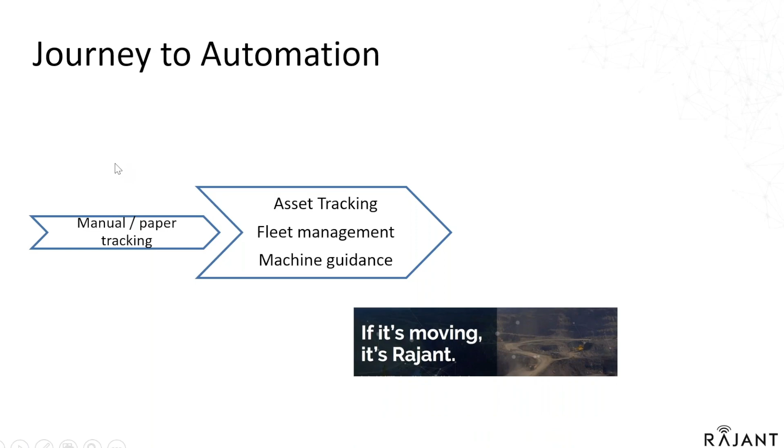So the mining industry's journey to automation obviously started with some manual tracking, paper tracking. Those days are long gone. Then most of you remember the introduction and adoption of asset tracking, fleet management, machine guidance, these kinds of software, hardware, technology solutions that required a very stable wireless communication. And as long as the wireless communication was working fine, nobody really thought about it. It's only when things started acting up or you had hiccups or loss of data that everybody was paying more attention to it. So this is the time that Rajant entered, and we fortunately were able to work with a number of mining operations to improve their use of technology.

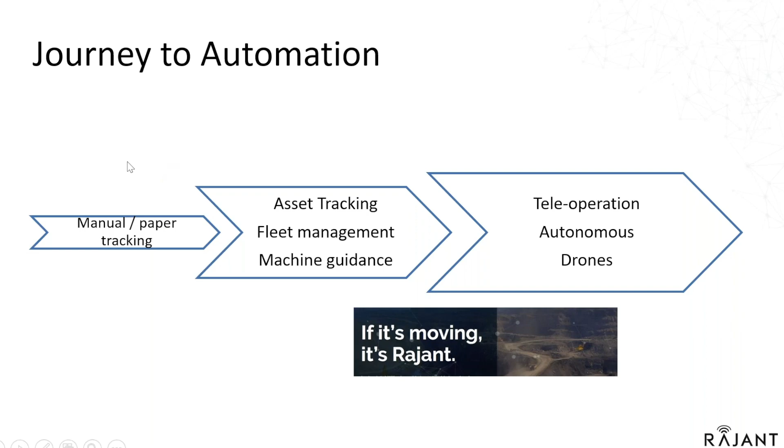So a couple of the 4 benefits that I feel are important are, first of all, we do not use a central controller. This allows a network to be really fast. And you will hear later when Samuel is presenting how fast our network can be when it comes to sending and receiving video from multiple screens. We always use multiple frequencies and antennas. This provides a very high level of availability. The word mesh, when we say we offer kinetic mesh, we have a mesh network. In our case, we mean that every unit, every node can talk to every other node, which is a huge advantage.

So let's get back to what we're here for. When it comes to these automation projects that mines around the world are undertaking, Rajant particularly has been involved in a number of them. There's a coal mine in the US that has been using a teleoperated dozer. There's a copper mine in Chile, and Samuel will talk to us about what is happening in Brazil with a number of iron ore mines.

The result is a much more reliable network for mining operations. Another detail that allowed Rajant to prove its value inside mining operations is the capacity to automatically adapt to dynamic operations. Mining demands dynamism, and its network needs to be available during movement, never breaking for handoffs.

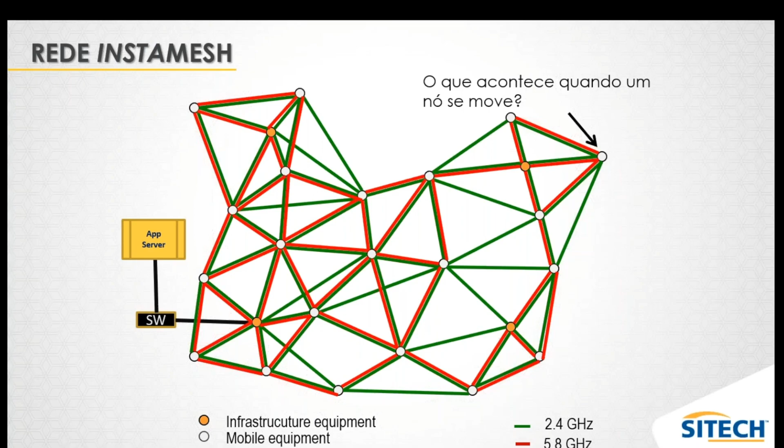As the equipment starts to move, it won't lose the many links it has to communicate. Before it loses the old links, it creates new ones as it gets closer to other radios. This is why Rajant uses the slogan, make never break.

The effect is the ability to adapt to movement. It is an extremely reliable network, exactly what miners need for their operations — never worry about networks and communications.

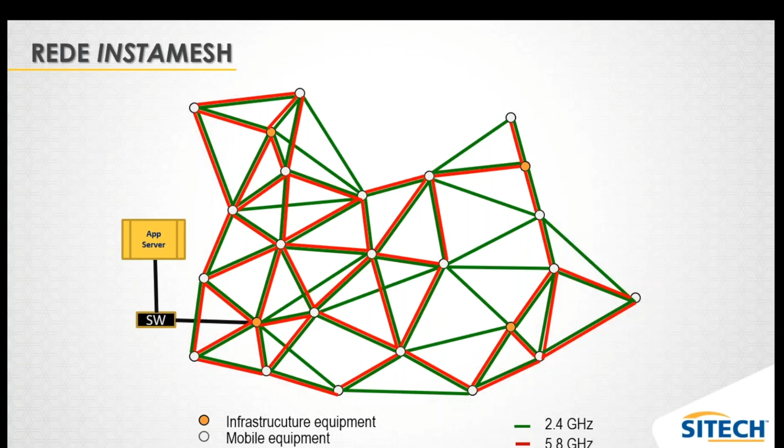Considering the specifics of the Rajant networks we spoke about before, how is it going to work in a real operation? Exactly as explained, every piece of equipment with Rajant inside will talk to the next machine or physical infrastructure: excavators communicating to wheel loaders, then drones, then pickups and trucks. Everything will talk and create a huge network for multiple purposes.

This includes telemetry, dispatch, fatigue monitoring, high precision, video surveillance, voice over IP, everything, and of course automation — all working on the same network.

In the Brazilian market, we are using some models from the Rajant portfolio. We have many units of the single band radio, the JR; the dual band radios, the KM3 and the ME4, working on 2.4 and 5.8 gigahertz; and also a lot of the 4-band radio from the LX family, which can also have 900 megahertz.

We use this equipment and these models according to previous network planning and to what the customer needs to communicate over the network.

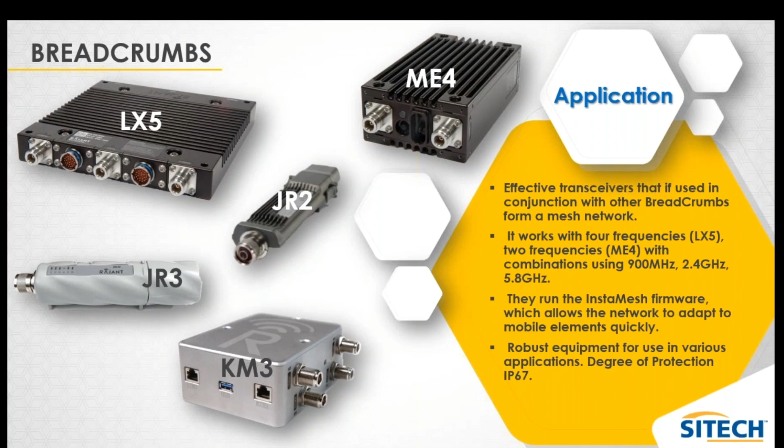Moving on to real examples of automation operating over Rajant networks. The first deployment in Brazil was for an ore stacker and reclaimers operation. These machines need to have constant communication, and each time the network had an issue, the whole operation stopped. The time to restart everything was considered a production loss, and these huge machines moved many tons per hour, so every minute was precious.

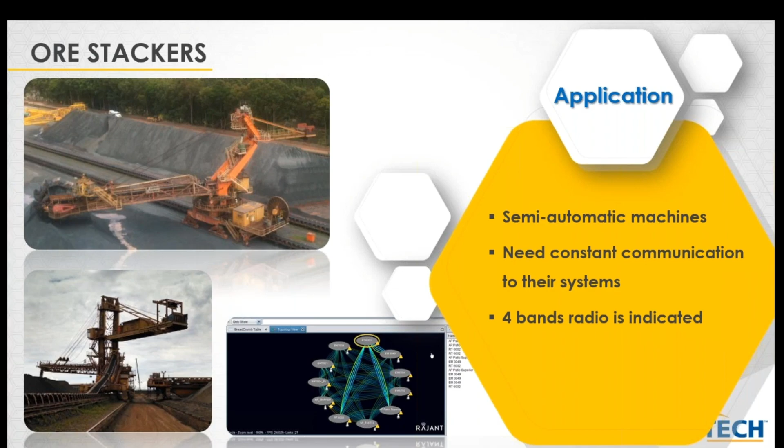For that solution, we considered using the 4-band radio to bring equipment and frequency redundancy. To confirm the increase of performance, and mainly what we could save in production losses if we could deliver a reliable network, we proposed a proof of concept.

That proof of concept allowed the customer to present this solution inside the corporation and defend it to be deployed over similar operations. They could present that the Rajant solution brought a level of 99.9% availability. This result was so impressive that they started to invite Rajant to new and more exciting challenges.

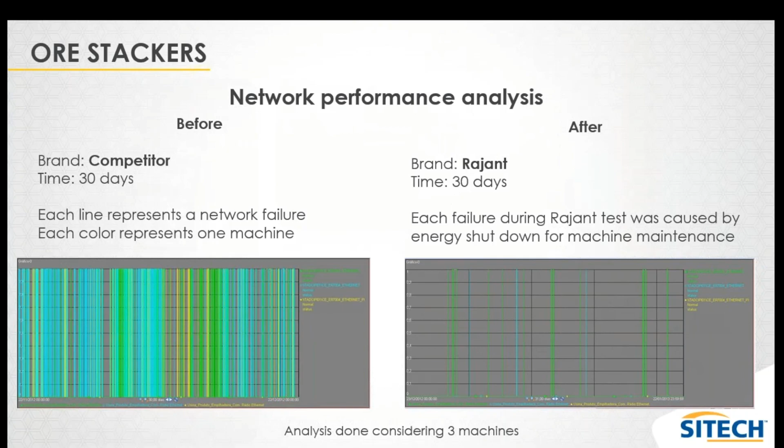So we started to help mining companies properly put many autonomous projects to work: autonomous drills, autonomous dozers, and different types of remote cabins. Rajant brought the desired level of latency, throughput for cameras, and all the technical requirements for these solutions to work properly. We will talk more about these types of projects during the presentation.

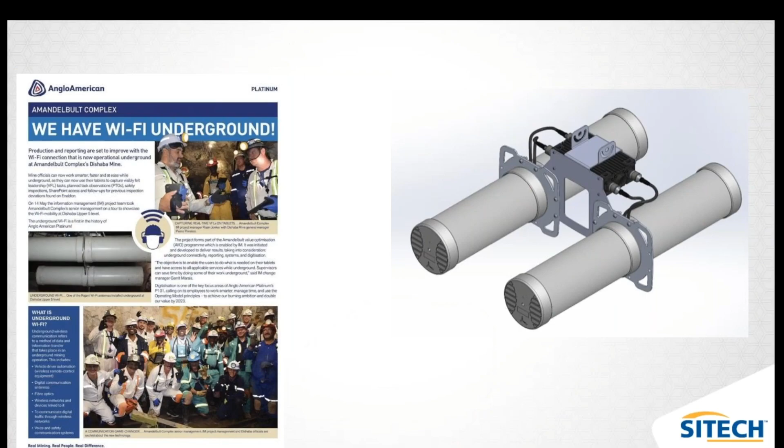Just let me check here. Saga, one minute, because I have to cover this part. One second please. No problem, I think everybody understands we are all working from a home office, and there are some unexpected challenges sometimes. Yes, you're right, I'm just checking if the slides are in the correct order so we can cover the right subject.

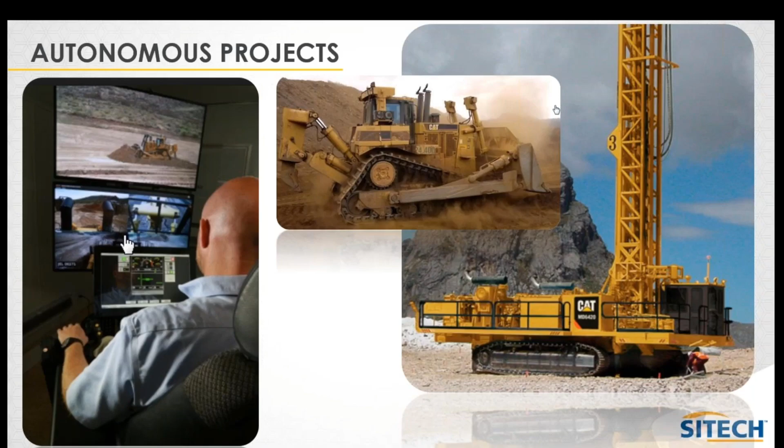Getting back to the real applications of automation, the next project that we supported - just updating the slide - was a very specific type of operation, but also with the same level of importance, because they needed to have a very reliable network.

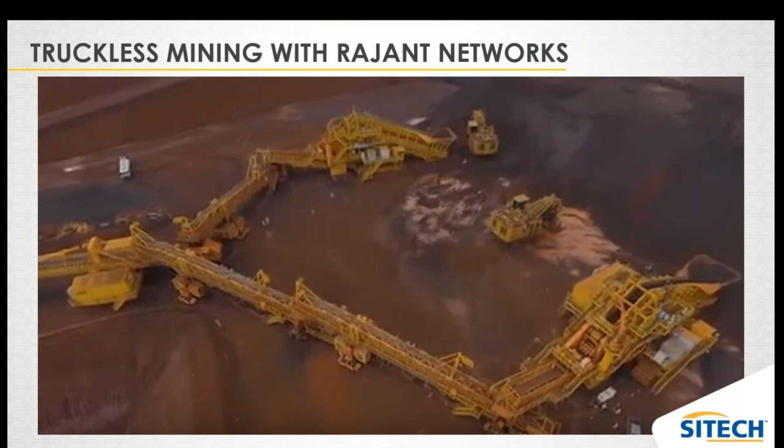It is truckless mining. Similar to the stackers and reclaimers operation, each part of this process needed to communicate with each other in order to properly work on the operation. And if a network failure happened, the whole process would also stop.

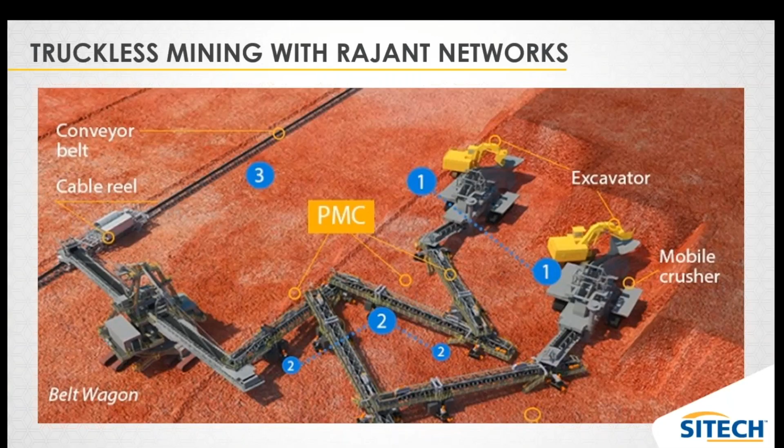So after we passed the PLC protocols challenges, we allowed the customer to move from a scenario of some $1 million in losses per month to not only zero losses, but also production capacity increases.

The most recent project for automation operating over Rajant networks was created after Brazil's recent episodes involving mining dams. We were challenged to design a way that companies would be able to remove material from the mining dams without the presence of humans in dangerous areas, which include not only the dam itself, but also the areas where the material could be projected if a collapse happened.

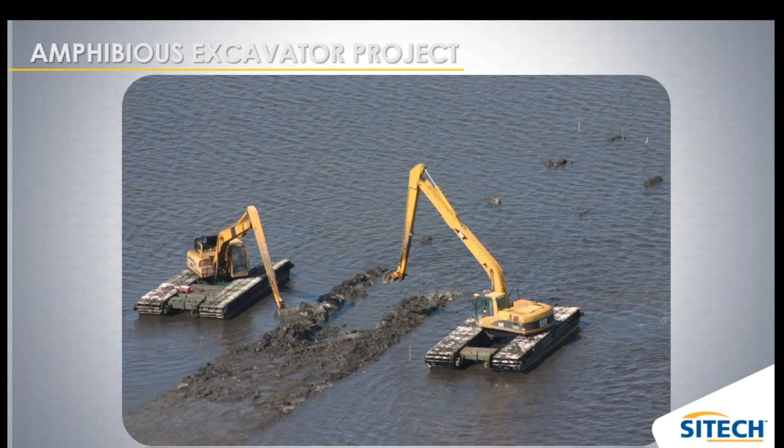So, including all the technologies inside the SITECH Brazil portfolio, we created a remotely controlled system for dam decommissioning operations, where it will be possible to operate heavy machinery inside the dam from a safe distance with precision and productivity. We could deliver this challenging solution because we were working during the last year on a request to apply remote control on an amphibious excavator that worked inside the mining dams, moving the material.

For this project, there was a risk that the machine could fall, so it was needed that the operation was unmanned. The operator would be outside the machine, operating from a safe distance or from an office, seeing the operation through cameras on a monitor or tablet. As we were already advanced on this solution, we were able to support the remote control for dams.

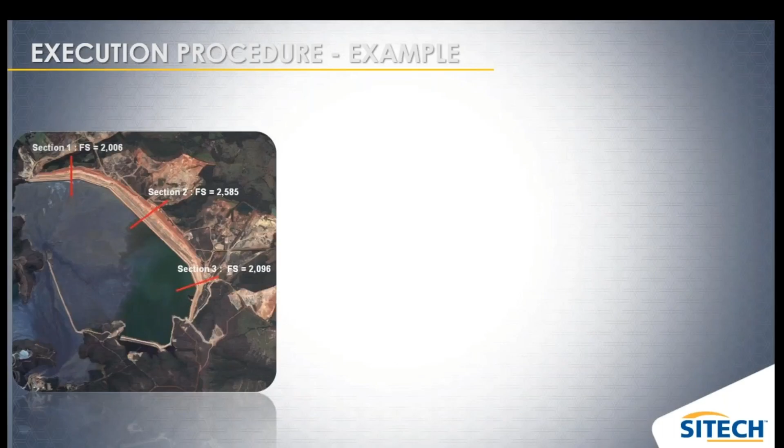Considering the dam decommission process, we would need to place not just one machine inside the risk area, but many, and of different types: trucks, wheel loaders, excavators, dozers. All these machines would be remotely controlled from a control shelter deployed in a safe area.

The red marked area over the picture is the dam area, where the trucks and machines would work. The blue area is where the safe shelters, the command centers, would be deployed, bringing high safety for the operation.

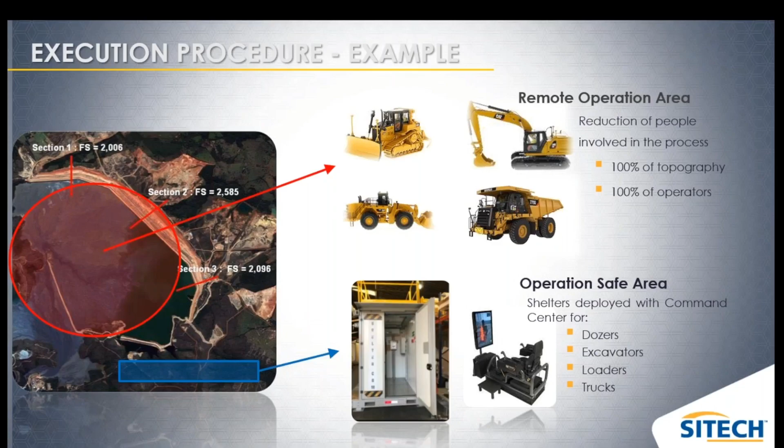In this way, there won't be any need for human interaction inside the risk area. We would place cameras at strategic positions on each machine, high precision machine control to allow the machines to operate according to a design project with blade automation, and radios to transmit everything in real time to monitors inside the control shelters. We would also use drones to collect images of the operation, upload these images to the platform, analyze and deliver updated data, update the 3D project, and send it back to the machines using the high-performance network.

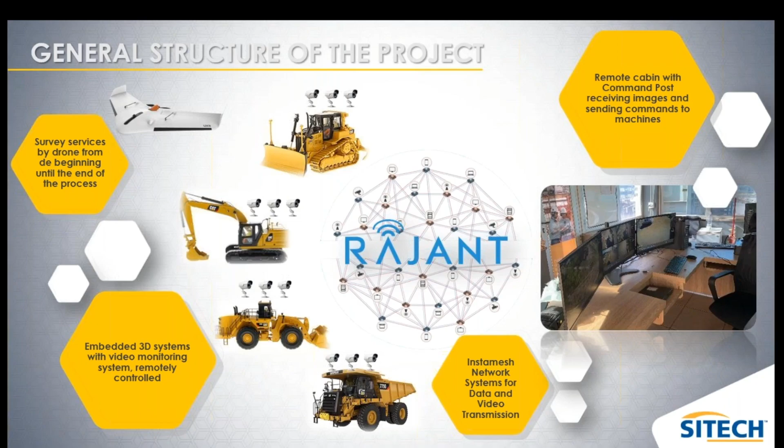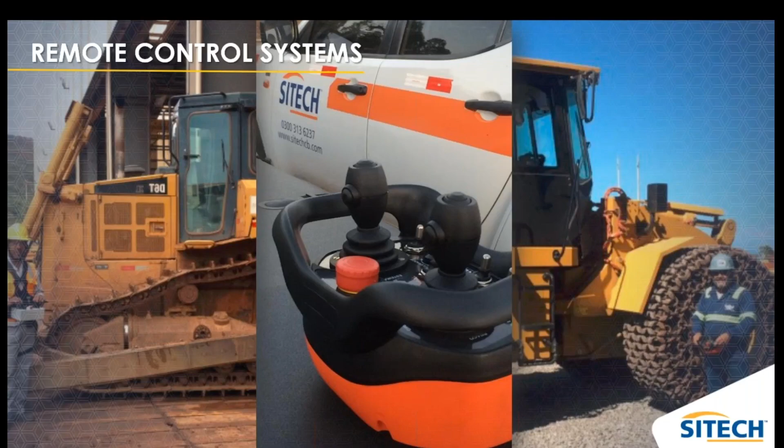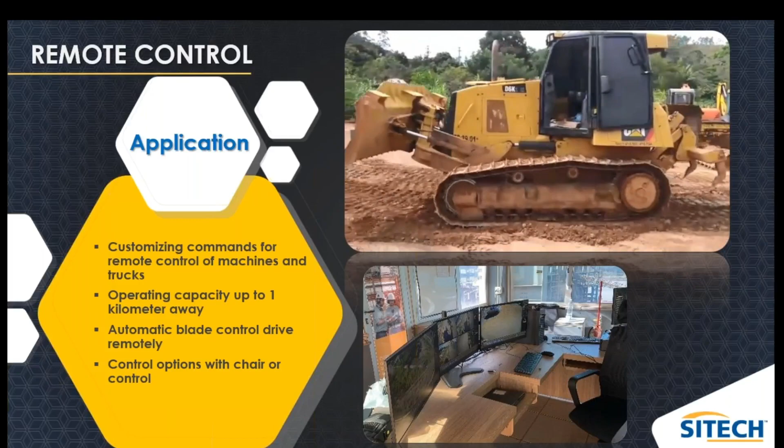The first technology we deployed, and a very important part, is the remote control. We used the remote control we already had in our portfolio, for the same reason we chose Navel as a brand to be represented by SITECH. They could customize the remote control for any machine necessary.

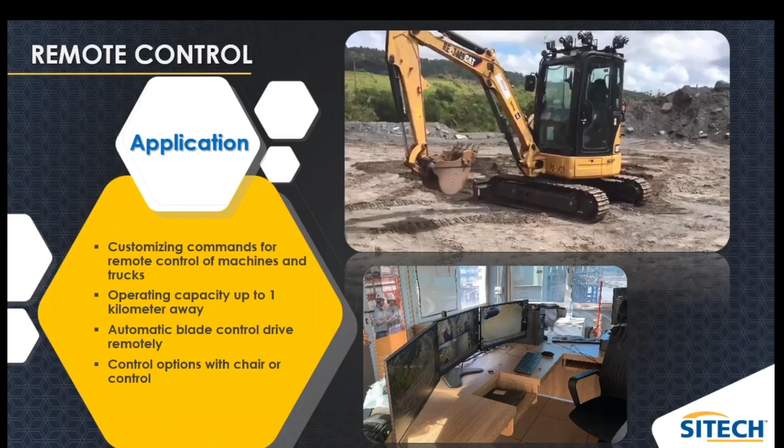We could operate machines up to 1 kilometer away, and we could include automatic blade control with high precision systems inside the remote control. We could operate the machines from a joystick, as you can see, or from a workstation inside the control shelter.

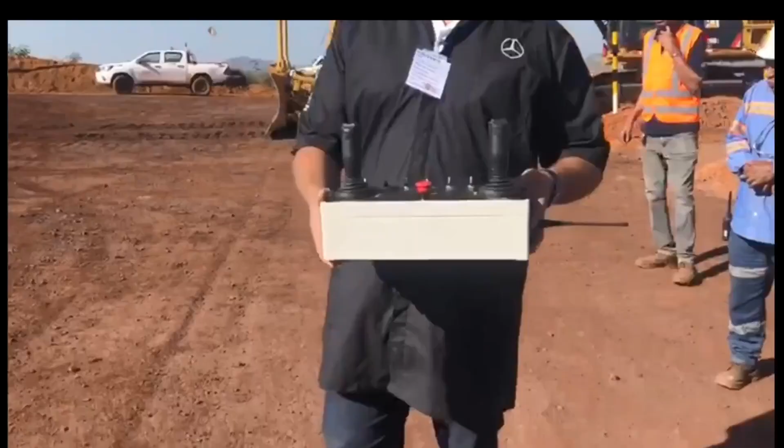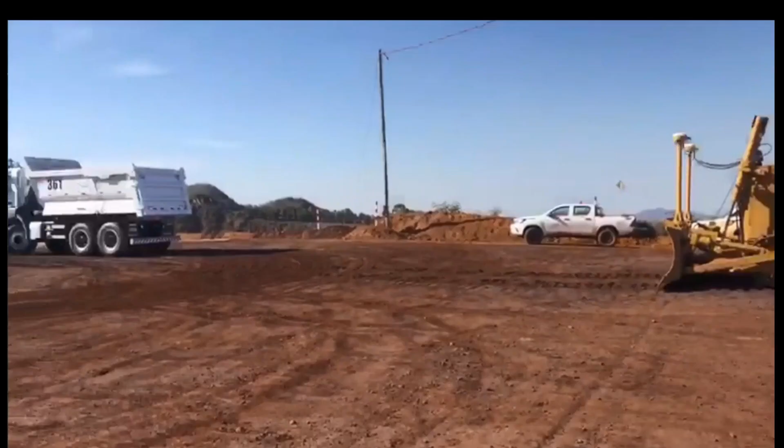One important achievement for us was the development of a remote control for trucks. We couldn't find this type of technology already assembled or designed in the market, and trucks were a big part of this project. Again, it was only possible because Navel has the ability to adapt and the capacity to customize its technology to different types of machines.

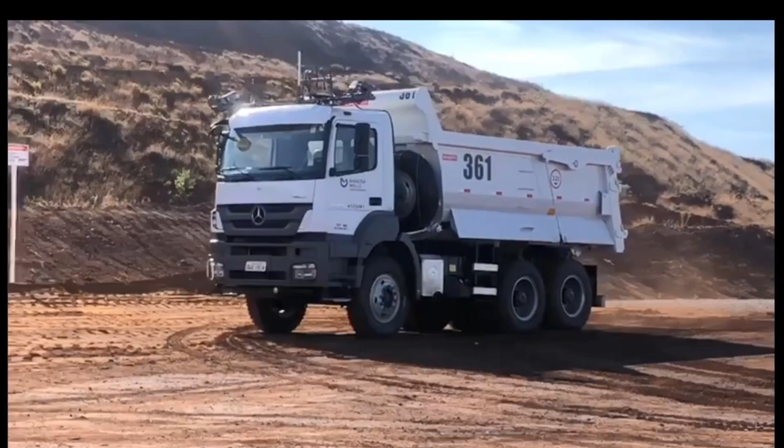As you can see, the truck is being driven from a joystick, and over the cabin you can see all the cameras and radios assembled and ready to place the machine inside the dam.

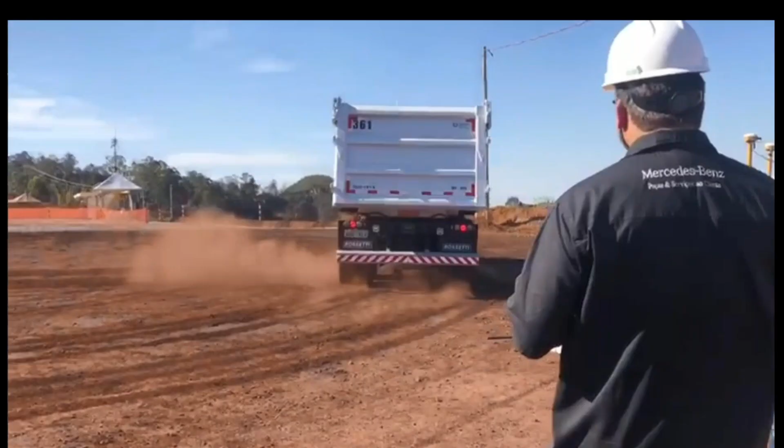After we had all the machines ready to work on our project, the next part was the infrastructure to put the operators to work remotely. We needed to provide proper infrastructure, not only for the operators to be inside a safe and ergonomic structure, but also to bring all the technological systems to allow the operation to run remotely.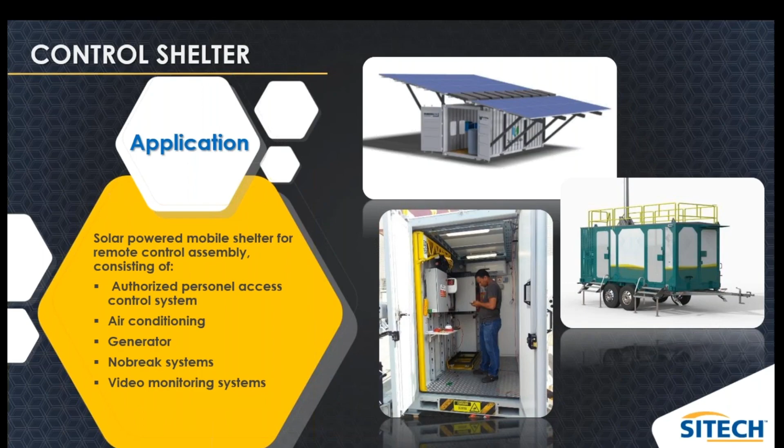Rajant communication, workstations, monitors, servers, access control for only authorized personnel, air conditioning systems, generators, no-break systems, video monitoring, and so on.

We designed, with our infrastructure partner Trailers RD, which is also a regional strategic partner for infrastructure, the control shelter that would allow up to 4 machines to be operated inside it, with everything needed to allow the remote operation.

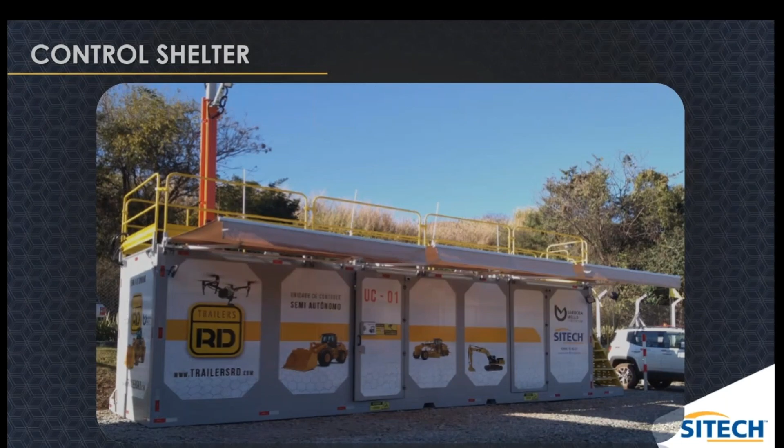Our first unit was created and came into life in the second semester of 2019, and the results were impressive. As you can see, the control shelter had everything needed to allow the operation to run from a safe distance using the full Rajant telecommunication structure.

All the workstations and monitors allowed the operators to see what was needed. Over the monitors, the operator could have all the images from the strategic sides of the machine, and also a view from the top to check where the machine was, and whether it was close to another machine or an obstacle.

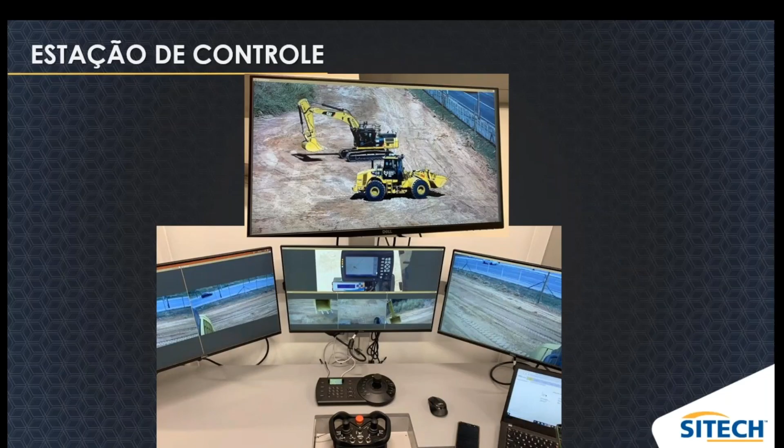All these cameras were configured in HD, high definition. The network was the core of the project. If the network failed, the whole operation could be compromised, because the operators couldn't have confidence to operate with delay or lack of proper video transmission.

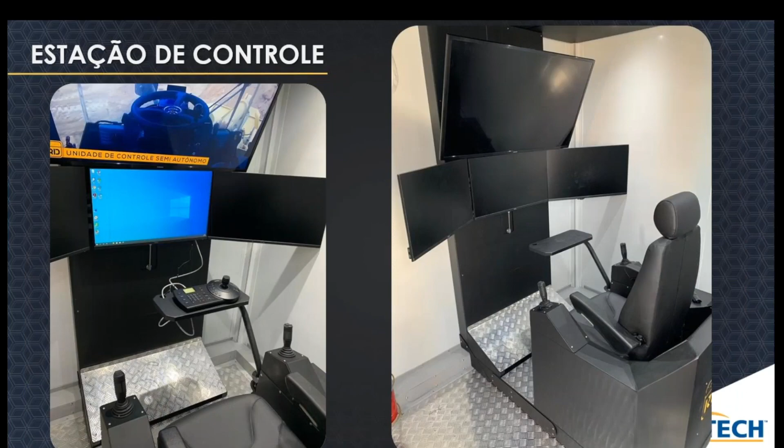We could also improve the solution by bringing more devices that could make the operator's experience of operating a heavy machine remotely closer to what he would have inside the machine's cabin.

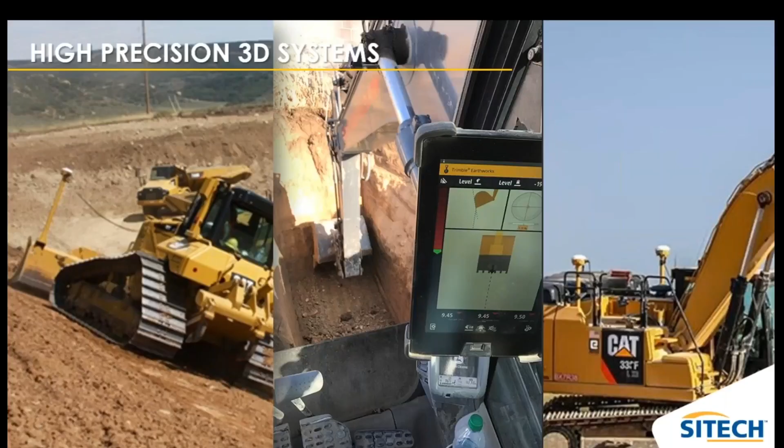Moving forward to the next technology we applied to our solution, safety was clearly the main point of this project, but we also needed to grant productivity and precision to what was being done by the machine. And that's the great thing about technology.

We included Trimble machine control to allow not only indicative high precision systems to guide the operators, but also to allow the blades of the machines to be automated and move automatically according to the position of the machine inside the operation, with the 3D project included inside these technologies.

Basically, the technology includes sensors and GPS antennas on the machines that receive positioning information from a satellite constellation and the correction of this information from a base station. This correction is called RTK, and it's what allows the machine to reach centimeters of precision. It is important to highlight that this correction may be transmitted through the Rajant network, and also the 3D project can be sent over the same network. Again, Rajant was being used for a multi-purpose network.

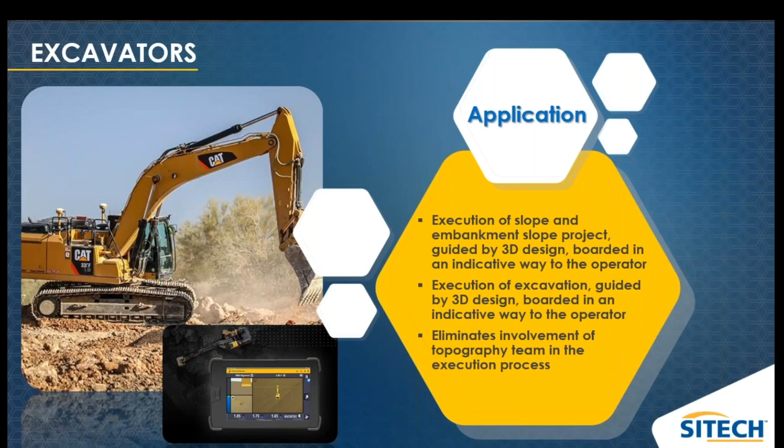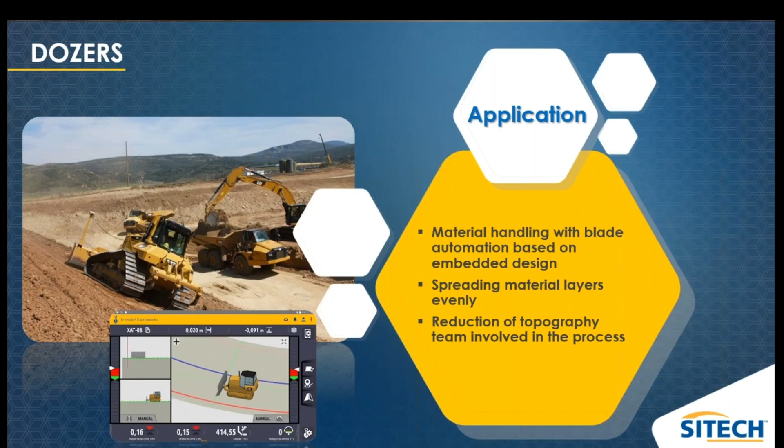So we used excavators to execute embankment and excavation operations guided by the 3D project. And one of the main objectives is to eliminate the topography team needed in the process. Also, dozers were used for material handling with blade automation, spreading the material in layers evenly, and also eliminating the need for the topography team in the process.

Finally, the process would be updated using drones to collect images of the operation. These images could be uploaded to a platform called Trimble Stratus, and this platform can analyze these images and extract much data and useful information from them, and mainly they can use the images to generate the 3D project that was going to be used on the machine control of the machines, and constantly update the operation project and send it back to the machines through the Rajant network in a cyclic process until the end of the decommissioning operation.

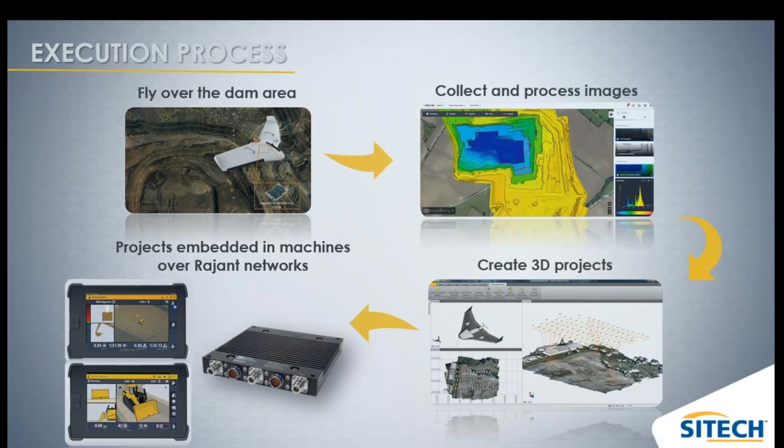So basically, the execution will follow a simple but deeply designed process. After the machines and the control shelters are assembled and deployed, drones will fly and gather the images, upload to the Trimble Stratus platform, process and create the 3D projects, and then send it back to the machines through the Rajant network. In this way, we wouldn't have any human interaction in the risk area, and then we could deliver the first unmanned technology for dam decommissioning process. So these are some of our automation operations running over Rajant networks in Brazilian territory.